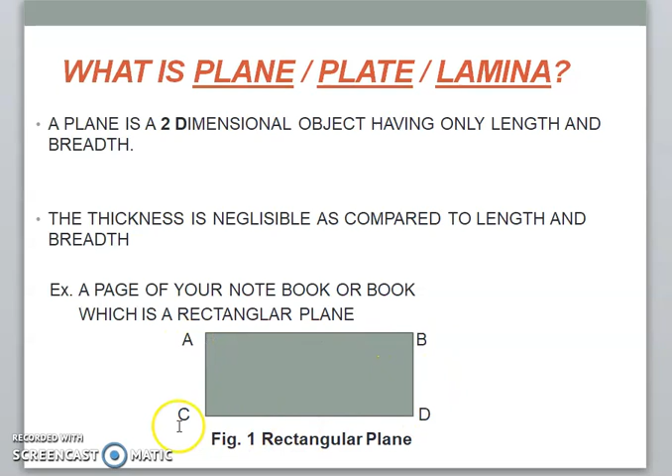Hence, a page of your notebook will be a rectangular plane. It can be shown by alphabets A, B, C, D. Next, what are the various shapes of plane figures? We can have square plane, pentagonal plane, hexagonal plane, circular plane, equilateral triangle plane, right angle triangle plane, rectangular plane, or in addition we can have semicircular plane.

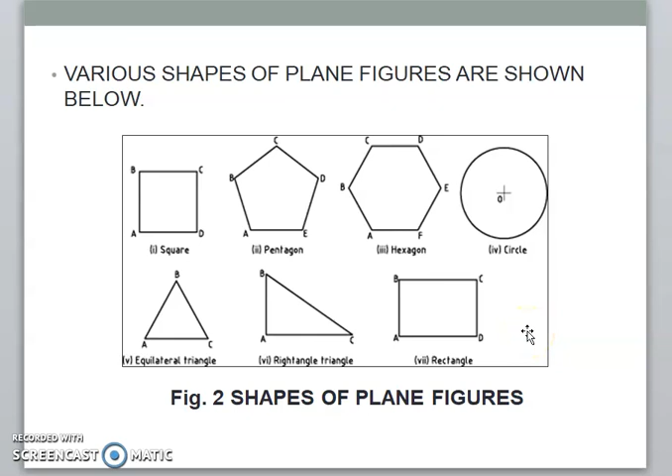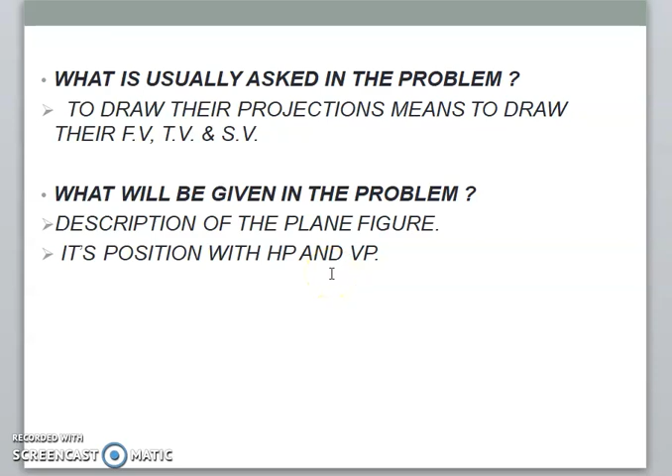Then what is usually asked in the problem? In the problem you are asked to draw the projections of planes, that is to draw front view, top view and side view of a plane. What will be given in the problem? The given will be a description of the plane figure, meaning which type of plane is used and its edge of base. From the edge of base we can draw a regular polygon, that may be square, pentagon, hexagon, etc. And next its position with HP and VP. So the angle the plane makes with HP or VP is given to us. In which manner its position with HP and VP will be described.

Now a plane has a surface, we can call it the base, as well as edges. Here is a pentagonal plane. It has 1, 2, 3, 4 and 5 edges and one surface or base. So in the problem, given will be how the edge of base AB is placed with respect to HP or VP. In type 1 the AB edge of base is kept parallel to the HP or VP. Similarly in type 2 AB is parallel to HP or VP. In type 3 and 4 the edge of base AB is perpendicular to HP or VP.

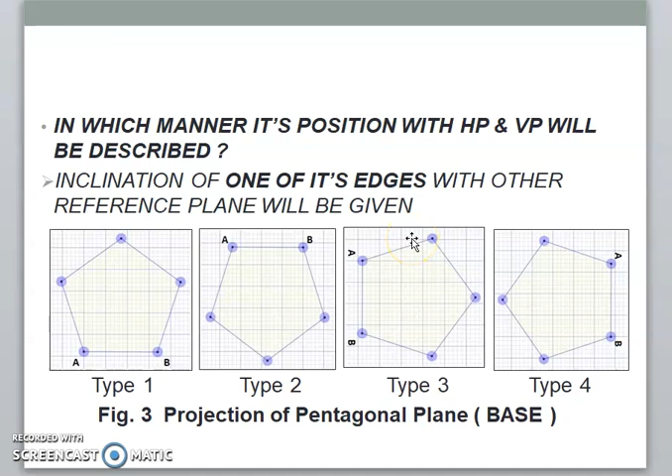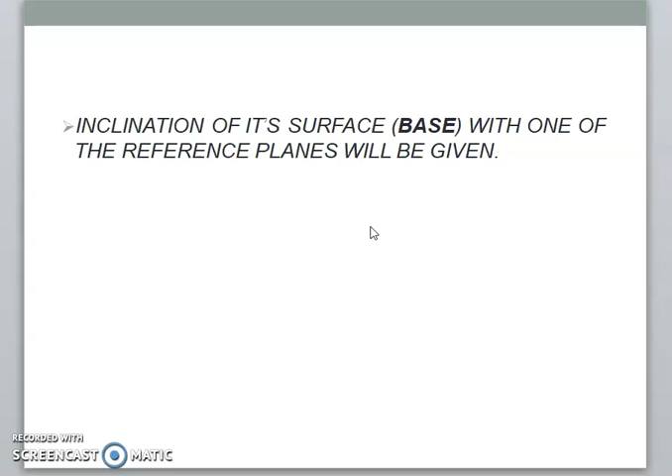Okay, so again, when to draw type 3 and type 4? Whenever we are going to incline the plane, if it is resting on a corner of its base, then we draw type 3, and when it is resting on its edge of base, then we draw type 4. So it is all about how the edge is placed, and next how the plane surface or base is kept, that is the angle the plane surface or base makes with respect to HP or with respect to VP, which are reference planes.

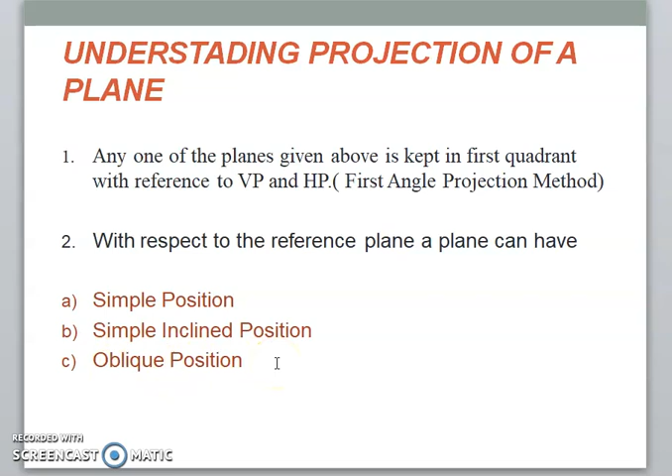Now, understanding projection of a plane. The plane will be kept in the first angle projection method, meaning it will be kept in the first quadrant. So you can see its front view and top view. With respect to the reference planes, a plane can have three positions. First, simple position. Second, simple inclined position. And third, oblique position. For the diploma syllabus, oblique position is not asked. Only these two will be asked.

So what is simple position? A simple position means a plane parallel to one plane and perpendicular to the other plane. You can see here in figure 4, this blue colored plane is parallel to HP. Also, it is perpendicular to VP. So it is parallel to one plane and perpendicular to the other plane.

So see here, we can see the front view in this direction. So from this horizontal plane, we see this distance. This distance will be called the distance above the HP. It can be seen in the front view. So you can see here from this point to this point, or from this point to this point, or from the axis to A dash, axis to D dash.

It is the distance above the HP. Similarly, in top view, you can see that from the axis to A or from this axis to D, the distance will be in front of VP. This distance will be in front of VP. Okay, now you can see here that the plane is parallel in front view. So the top view will give true shape of plane.

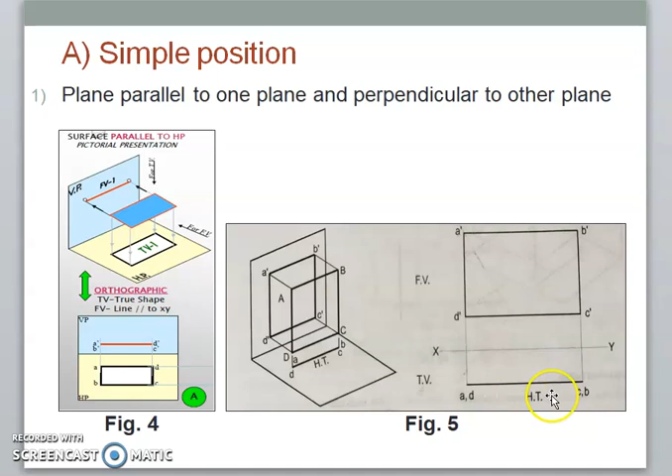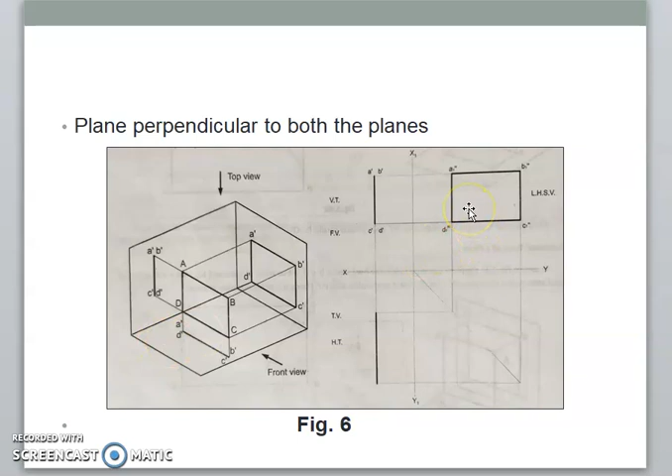Then you can see its true shape from side view. From side view you will have its true shape. It is left hand side view.

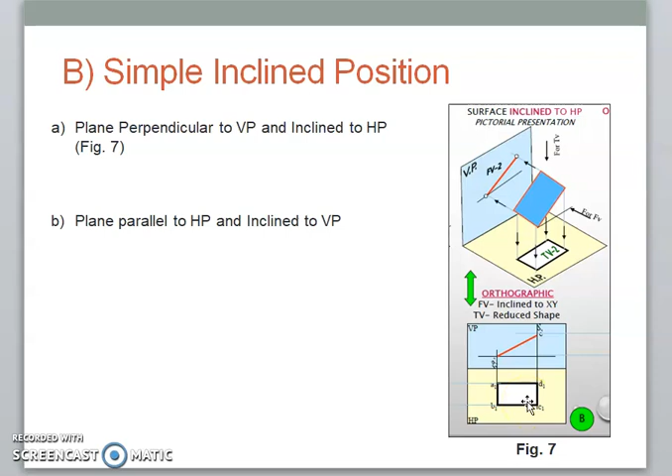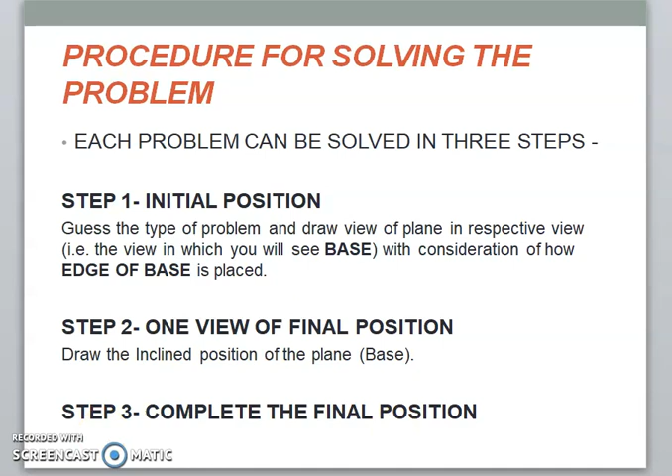Okay, so what are the assumptions for initial position? So if in problem surface is inclined to HP, assume it is parallel to HP and draw its true shape in top view and line view in front view. Or if surface is inclined to VP, therefore assume it is parallel to VP first, then in front view you will see its true shape of plane, and in top view you will see a line view.

Second one, now if surface is assumed parallel to HP, its top view will show true shape, and if surface is assumed parallel to VP, its front view will show true shape. Hence begin with drawing front view or top view as true shape. Means you have to draw base as how the plane is kept with respect to HP and VP. While drawing true shape, keep one side or edge of base which is making an inclination perpendicular to the axis line.